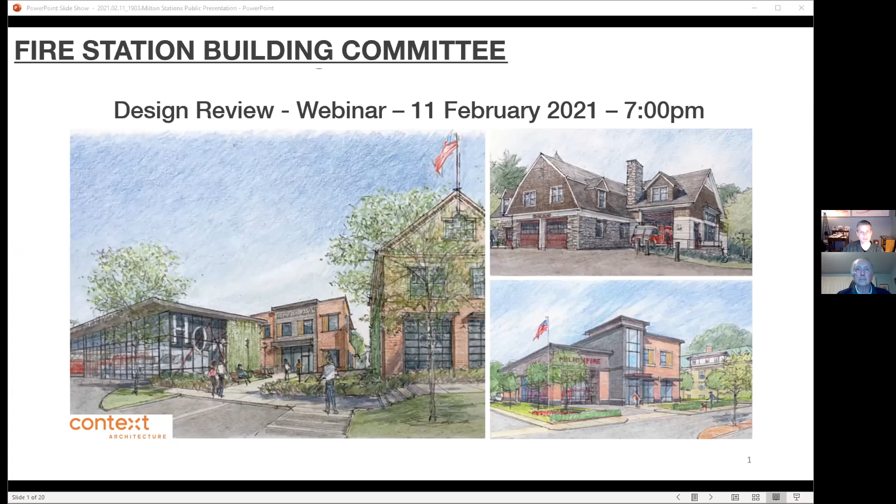So the mandate to us and the committee as it currently exists is to develop fire stations for Atherton, East Milton, and the headquarters. Our first task was to work through the programming of the stations, which meant we needed to figure out exactly what the space needs and requirements were in each station. A prior study had identified a certain amount of space for each of those stations, and our task was to vet that and confirm those space needs were adequate.

So here are the 3 stations. I'm sure you're well familiar with Milton. Just wanted to remind you where we'd be working: Atherton headquarters and East Milton. And there's good rationale for maintaining those locations for response time.

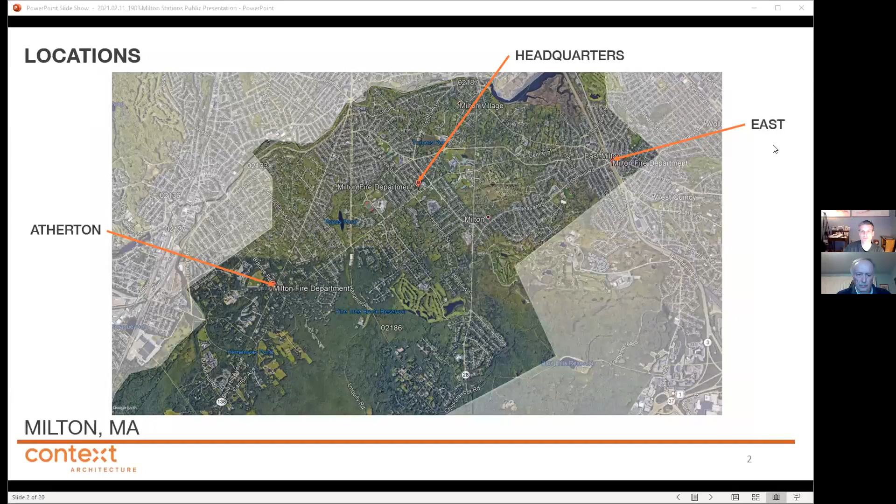Each station has its own unique components, but generally the overview for programming was that at the headquarters station, we'd end up with a building roughly 20,000 square feet. It includes the fire administration, which is about 1,500 square feet, and an apparatus room housed for 5 bays to house a lot of the equipment and frontline as well as reserve apparatus that the town currently maintains.

At Atherton Station, a station of roughly 6,000 square feet, with the potential for either reusing the 2 existing bays and potentially adding 1 new bay for a modern apparatus engine. And at East Milton, the program called for again just under 6,000 square feet with 1 new bay for an engine.

The program process included a very detailed review of the existing conditions of the stations, how the departments currently operated, and what equipment and personnel they had, as well as comparisons to new and standard fire stations for space needs requirements currently being used nationwide. We compared these standards with the department's earlier study and developed one sheet of paper for each room for every single station for the entire program.

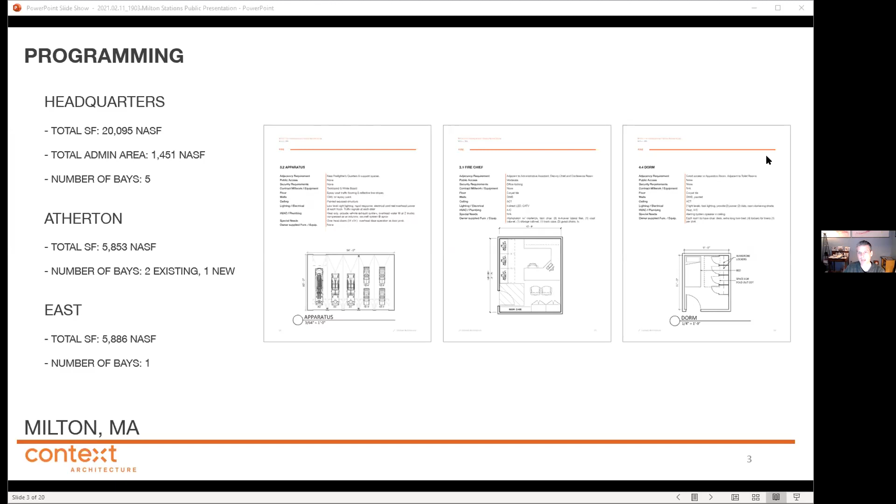After doing all of that and compiling the numbers as we have, we then understand the exact requirements and then get into the design of the stations.

One of the key goals of the building committee and the town, as well as our design team, is to create sustainable and energy efficient facilities. A decision was made early on that these facilities would be carbon neutral, essentially requiring an all electric building design so that they could be potentially powered in part by photovoltaics or other renewable resources. The town could also participate in purchasing programs where you purchase green power to power the buildings, but we wouldn't be using any fossil fuels on site, which includes the ranges at the fire station kitchens.

We'd be targeting an EUI goal of 100, which is an energy use intensity goal of 100. For public safety, it's quite ambitious because the national average for public safety is 125. Obviously the goal is to reduce this as close to 0 as possible, but with a 24/7, 365 facility, it's challenging to get there. We're also targeting a LEED Silver rating for the building.

As I mentioned before, solar panels are being considered for the roofs of most of the buildings and potentially ground-mounted solar panels where appropriate. The design of the building envelope and the windows, doors, and other components will be based on high-performance design, heavily insulated with robust air barriers.

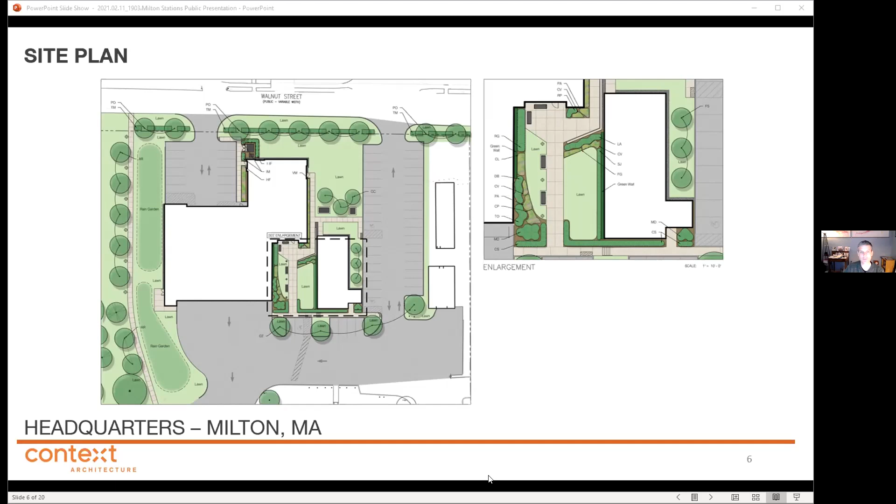We worked very closely with the neighborhood during the design of this project so that the exterior design, the massing, and the configuration of the site works well with the neighborhood's concerns. And to date, we've heard a very encouraging response.

The building plans include a first floor, which houses most of the apparatus functionality and all of the administration, as well as the training room in the existing headquarters. On the second floor, we have loft space for additional storage and training for the firefighters, as well as living quarters for the firefighters.

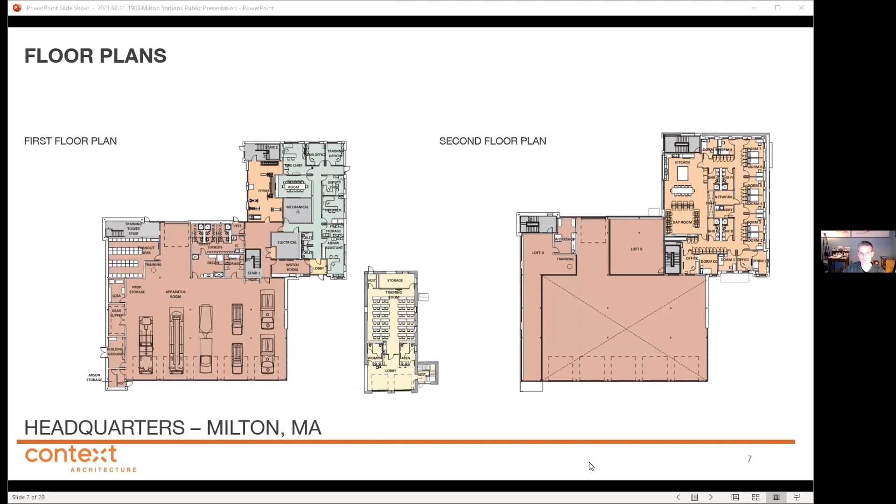These are the renderings, as you saw at the beginning, of the front of the station, which you can see just behind Town Hall, next to the original headquarters building, which retains its original massing. And then at the rear of the station, facing the neighborhood. The design of the building is intended to really reflect the needs of public safety, but also recognize that it's a very visible and important component within the town.

Here's a short video that will show you how the phasing will operate as the building goes under construction. There are a few specific components that we need to point out.

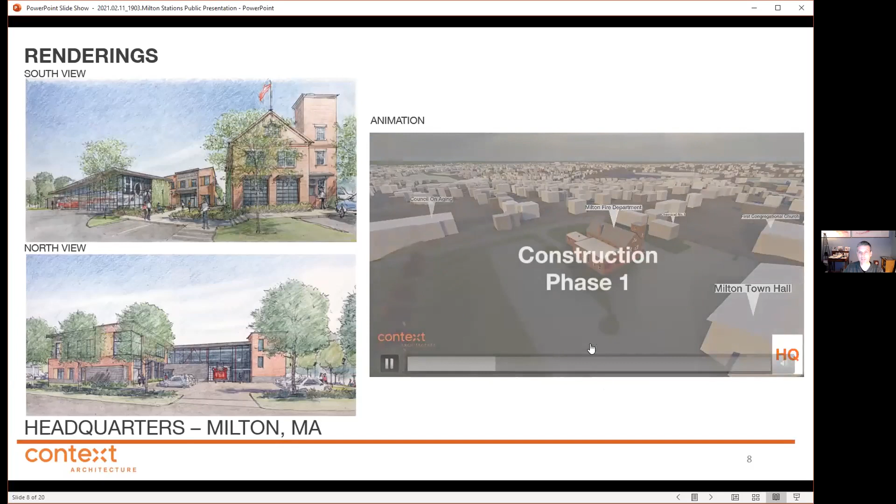First of all, at the headquarters, the existing lot next to the station will become part of the future building. So the first step is to take over the land to the right of the station, as you can see here, and build a new 36-spot parking lot.

During the second phase of construction, we'll largely be constructing the building itself. As you can see it fly in, the entirety of the building will be constructed in this phase, as well as the aprons and the back rear egress.

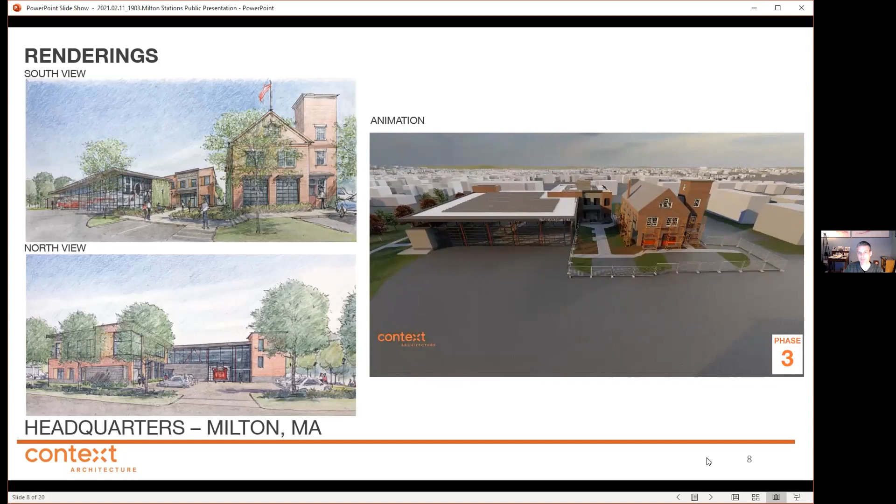The fire department would move in, and then a new phase would begin where we would renovate the original building and also demolish the 1980s addition to create a new entryway to the new fire station.

The materials of the building include a lot of materials that are found in the nearby neighborhood. We're actually bringing in some of the design elements and materials that are in the neighborhood, including brick, wood, and use of metal. A lot of design effort was put into the apparatus garage so that it's very visible to the public for what's going on in this building.

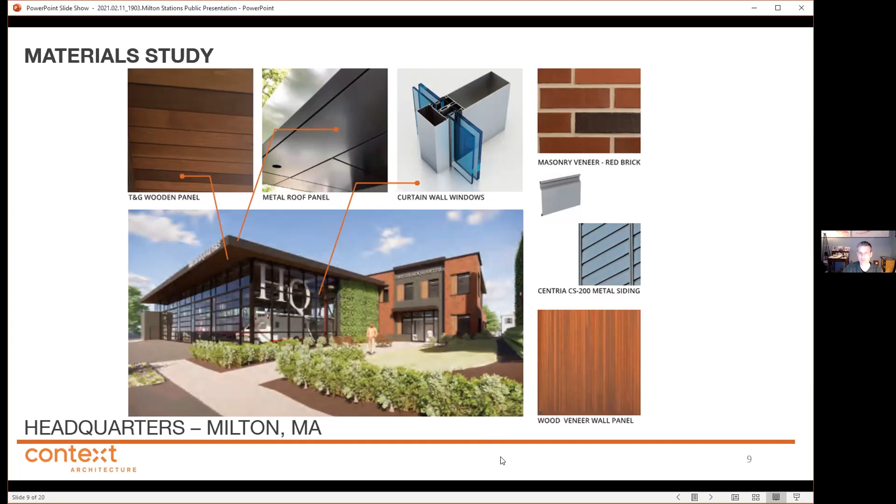And a lot of the design cues for the windows and other areas of the building take on aspects of the neighboring buildings.

At Atherton Station, we went through a lot of different efforts to determine what the right configuration was for a new building. We looked at a separate building further down the hill. We looked at building a new building close to the existing station, but not attached to it. And we looked at removing the existing handsome fire station.

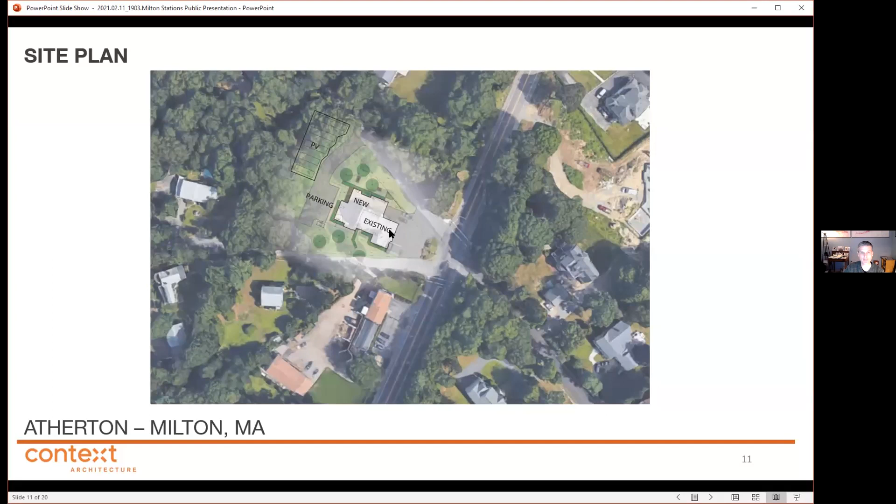At the end of the day, the most cost-effective way, and in fact we think the best way to honor the Atherton Fire Station, is to make an addition to the building, which you can see here as an L shape around the back. This has a couple of benefits.

Primarily, the main benefit is to create a new apparatus garage for a modern fire engine, which is much heavier and bigger than can fit in the existing building. We also had to create modern crew quarters on the second floor, and all of the space necessary for decontamination and gear storage on the main level, as well as a fitness room on the lower level.

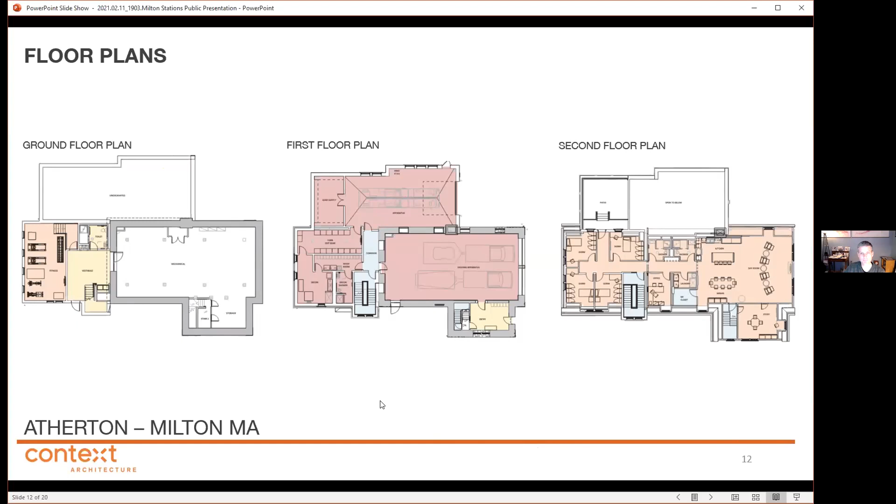The materials of this building are very unique to the existing structures, so the new addition tries to pay homage to that, including the use of cedar shakes and the stone veneer that is similar to the existing stone.

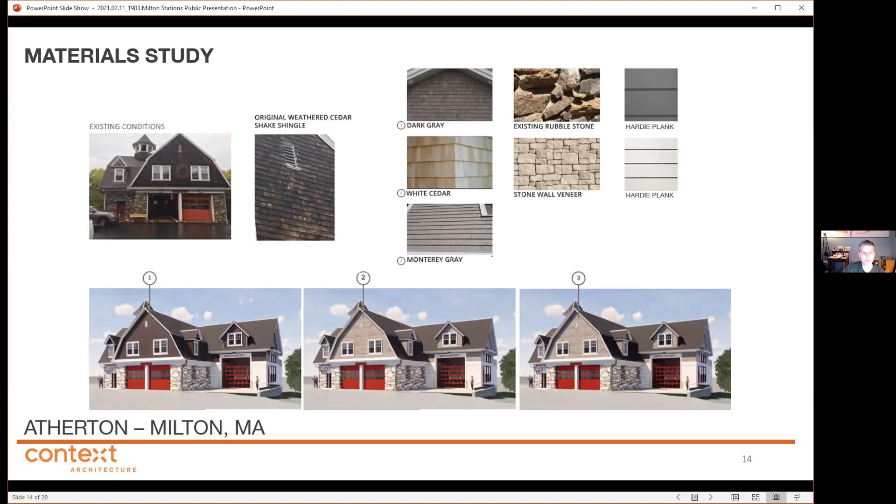We'd also be restoring and renovating the existing building so that the facades, the roof materials, and everything would be brought back up into good condition.

At East Milton, we're proposing a new site next to St. Agatha's. This is on Adams Street, and it's ideally suited to a fire station, considering the access it has to traffic, both going in both directions, and the proximity to the existing neighborhood.

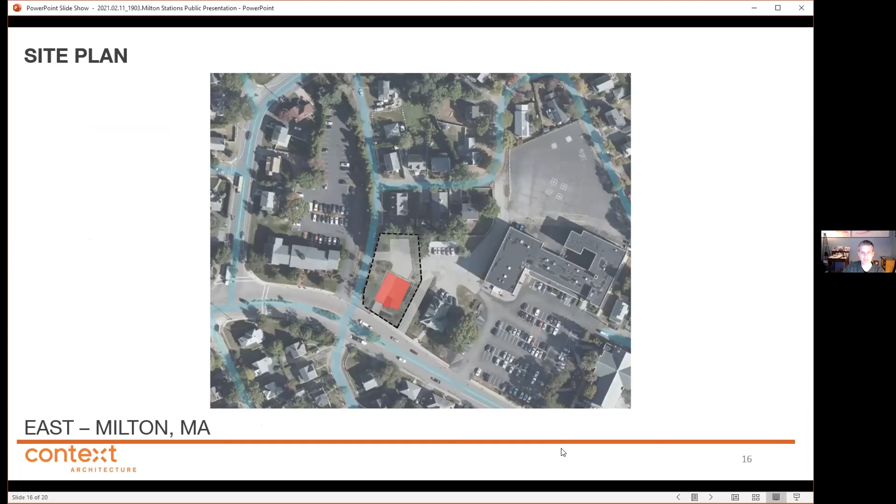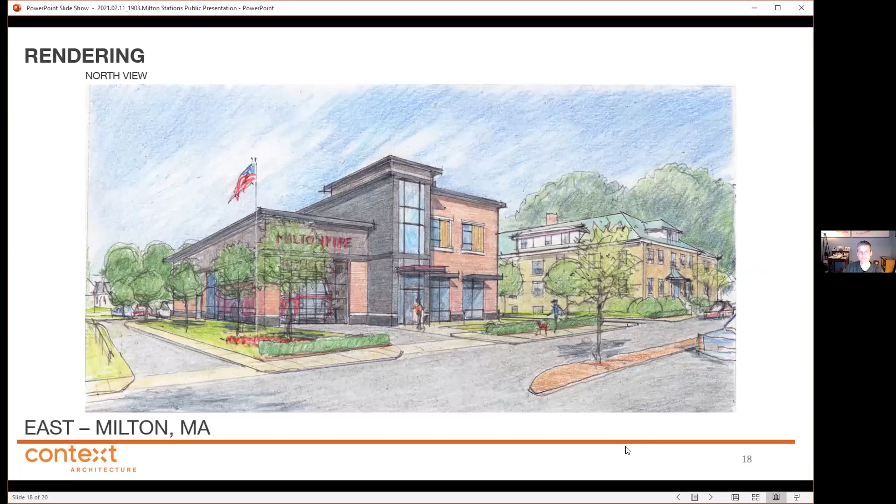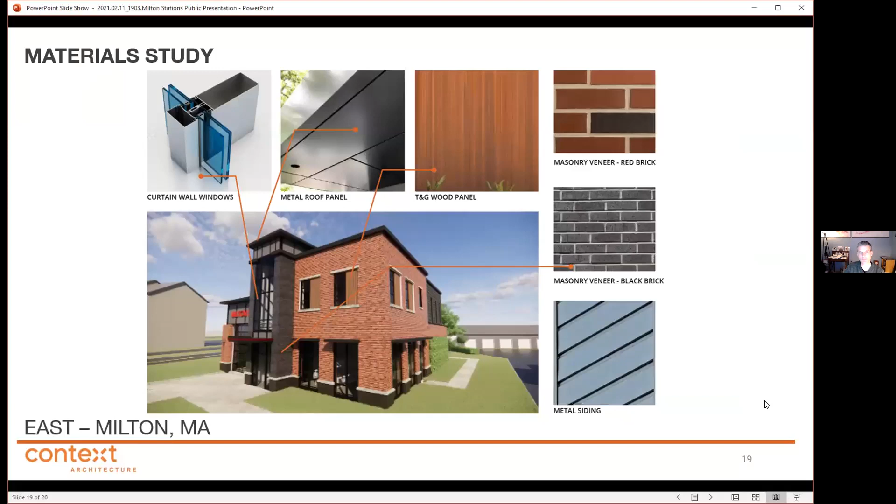Materials here would be similar to the headquarters building, with the additional use of some black masonry veneer, as well as red brick masonry veneer. This design was intended to keep with a lot of the same design cues that were happening at the headquarters station, so that the pair of these buildings would look like they belong together in Milton.